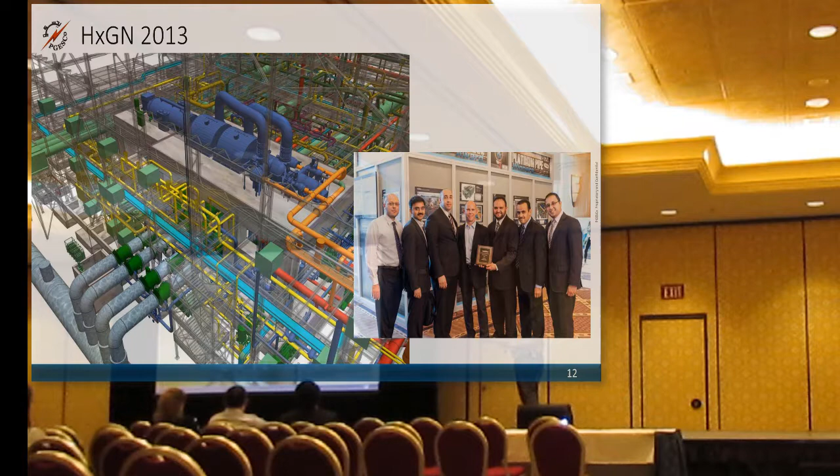Those are some of the awards and patents that we have received. It started in 2013, and yes, that was HXGN. We received first place in the civil specific category in the Golden Valve competition. As you can see, this is an example of one of the outputs we delivered using SmartPlant Review, which is an add-on module called the photorealistic add-on module. You can see that the piping was color-coded using display sets and this stuff. This is the main objective of this session - how we generate such beautiful drawings for presentations and owner presentations, okay?

Again, our civil department, Dr. Sami, has won the GTSTRUDL Excellence Award in 2014, and we won another award from Tekla, Middle East. In 2015, again we thought about putting the entire model inside the Golden Valve to win, and it worked apparently - we won second place also in the Golden Valve in 2015.

That was another award, and this was the first time we participated and won the Platinum Pipe competition. It was an automation idea presented in SmartPlant Review. We won second place, and I was honored to be presented by Robert Christian from Hexagon.

I delivered a session this year also, in 2016, and this was the first and last time, as I recall, Hexagon moved out from Las Vegas. It was in California. I loved California actually, and we delivered a session there about touchless design, computer interaction, and 3D design and review.

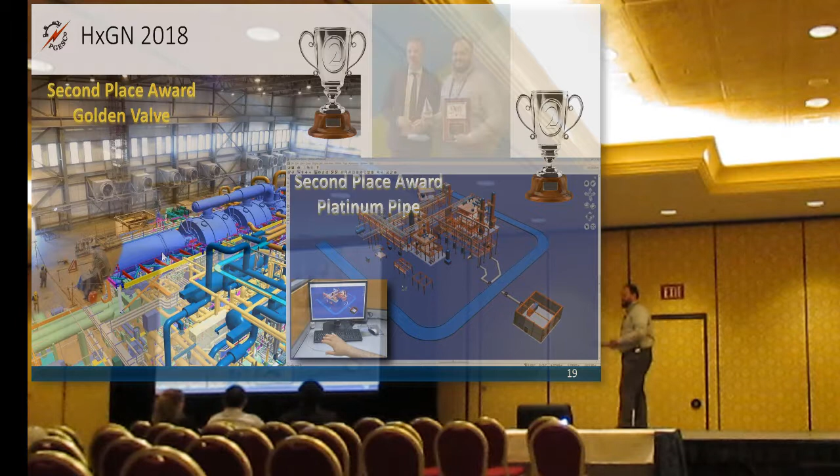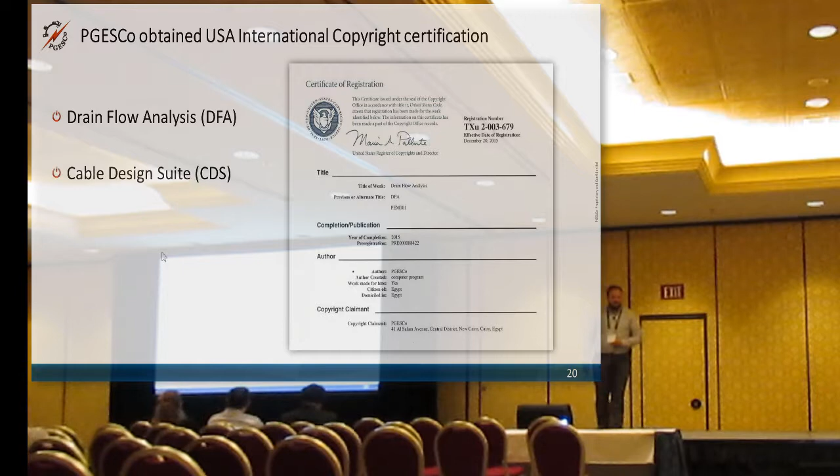We have won a number of patents internationally recognized. This is a US copyright for a drain flow analysis software that our engineers developed regarding the drain analysis of steam in power plants. We also developed another software for cable design and pipe support special items.

Now I'm going to move to the main topic of this presentation, the rendering and visualizing modeling group. Its target is to prepare good presentations and visualization for our projects to present to owners and clients. Our management realized that pure engineering works and drawings do not get that attention, especially when applying for a new project.

They thought we need to present our work in a more fashionable and luxurious way to show it to project clients, especially in the bidding and tendering phases, and it actually worked. In some cases we submitted our paper in a tender, and with just beautiful images and animation, the client was very impressed without going into details of the design. So it works somehow, and that's why this group was formed.

It's officially formed, called the Rendering and Visualizing Modeling Group inside PGESCo, and we mainly depend on Hexagon PPM products, as we can see in the following slides.

The main target is to prepare, as I said, snapshots and walkthrough videos for presentations and high resolution images, and to contribute in international design competitions like the Golden Valve and others.

We have performed some R&D activities, which we'll go through, in CAD and the user interface between the designer and the computer, and of course knowledge transfer and knowledge bridging to the new generation of engineers and designers. This is all tasks performed by our group.

This is one example of a model we got from engineering. You know how bad it looks. It's supposed to be 4 units, but there are only 2. After we did our job in the rendering group, it looks something like this. Some engineers just work for 1 unit and assume the other units are the same, so whatever clash is solved in 1 unit is considered done, and they didn't require the model of the other units.

However, the plant has 4 modules. If we go to the owner and show him this model, he'll say, well, where are the other 2 modules? So we have to do this copying using the MDR and stuff to get the model in good shape. Of course, you can see there's no land, no roads, no lighting poles, nothing. So we add all this, and the architectural team colorizes the cladding to make it look much better.

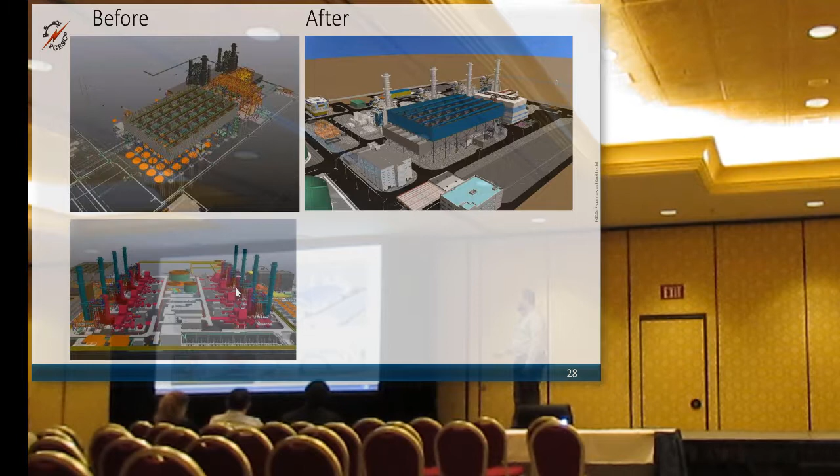That's another example of a project. This is the engineering project. As you can see, if we present this in front of the client, it will not have the same influence as this one.

Again, some sample output presentations that we use for the coloring, and this again, one sample. This was actually submitted to the Golden Valve this year, but it didn't win. It's okay, no objection.

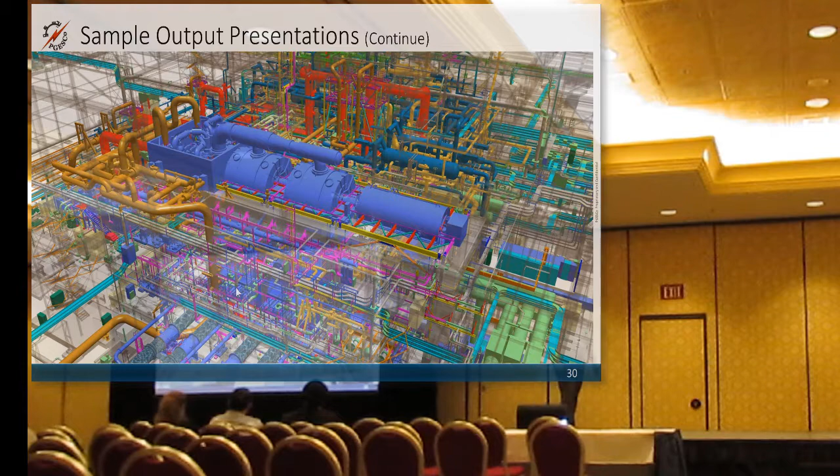Another one, it's an inside detailing of the STG building. It shows how the piping works. The engineering guys did a lot of work there in the cable trays and stuff. I'm going to go through those. This plant is in Egypt, apparently.

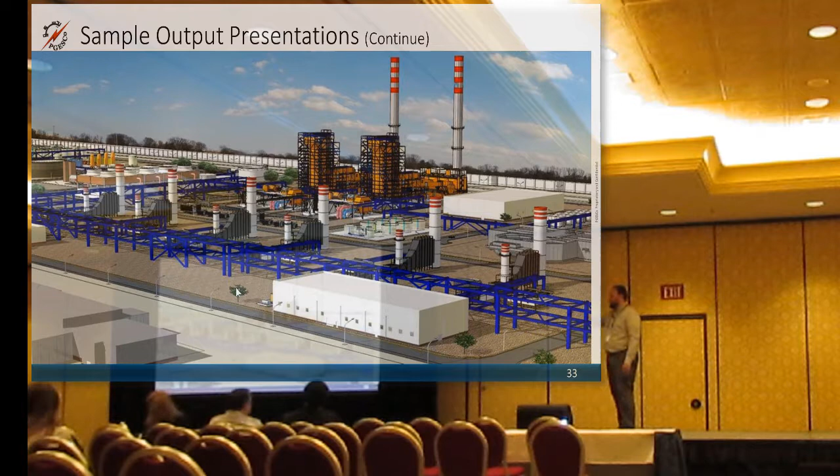This is one sample of projects where we don't have a 3D model. All of this is built in Google SketchUp. This is the only plant not using a Hexagon product, okay? All of these used imported blocks, and we can create this from scratch. We did this in 5 days, all of what you see here, for the presentation. We also did a walkthrough video that was very impressive for the client.

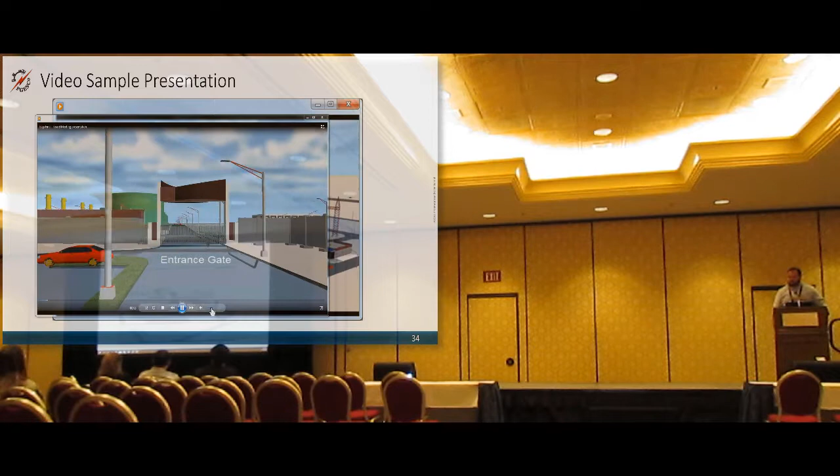This is a sample walkthrough, let me turn it on for you. Well, there's not just one, but I'm not going to go through all of it. Just to see a sample of how smoothly walkthroughs are done using SmartPlant Review. This is one of our projects in Iraq, before the war actually.

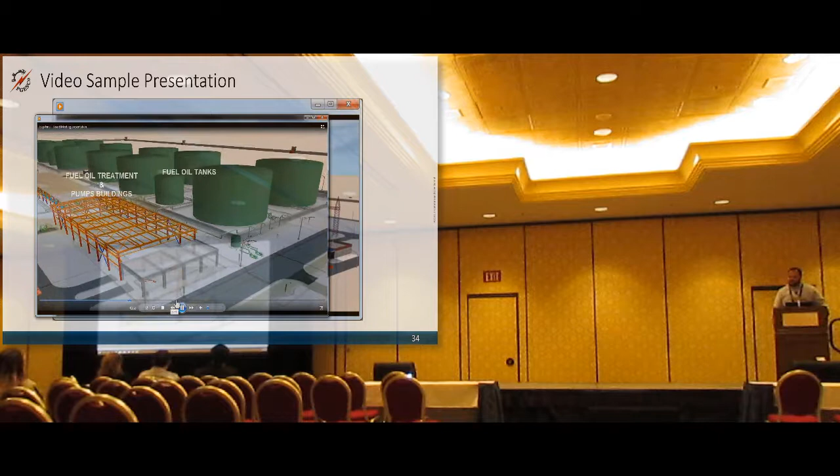This also helps the project manager when he goes out to the owner and describes the parts of the plant. He used this type of presentation.

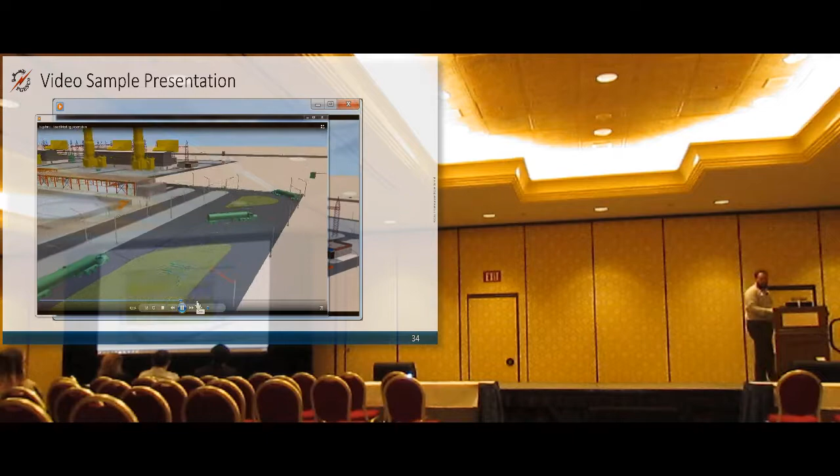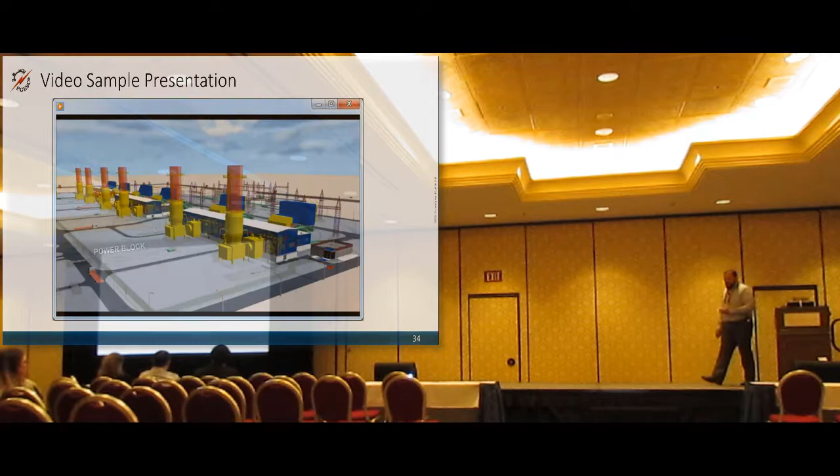Moving on, rather than just preparing images and screenshots, we were involved in some technology innovation solutions that we developed for our engineering team. I'm going to go through them in detail.

We are using something called stereoscopic 3D display, a feature in SmartPlant Review. We have developed 3D PDF, and we'll see how this goes. We also have our own VR lab. I will go through these one by one.

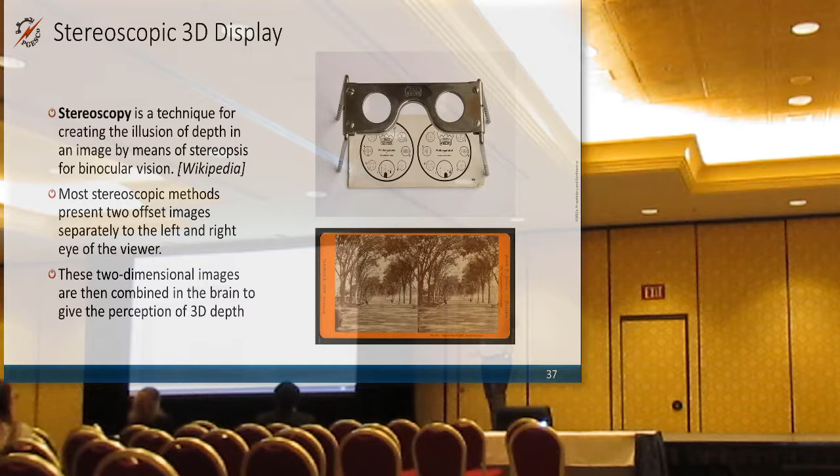The stereoscopic feature depends on the idea that every human being or animal has two eyes. Each eye catches a specific part of the world, and then the brain combines them together. SmartPlant Review does the same, it has this feature. Does anybody know SmartPlant Review? Please raise your hand. Okay, good number, it has this stereoscopic feature.

This is one of the unexplored features of SmartPlant Review. I wonder why the guys here don't highlight this, however it's very important and can be used a lot in the presentation of power plants. You can activate the stereoscopic feature in SmartPlant Review and get a glass to see the visual 3D aspect of the model.

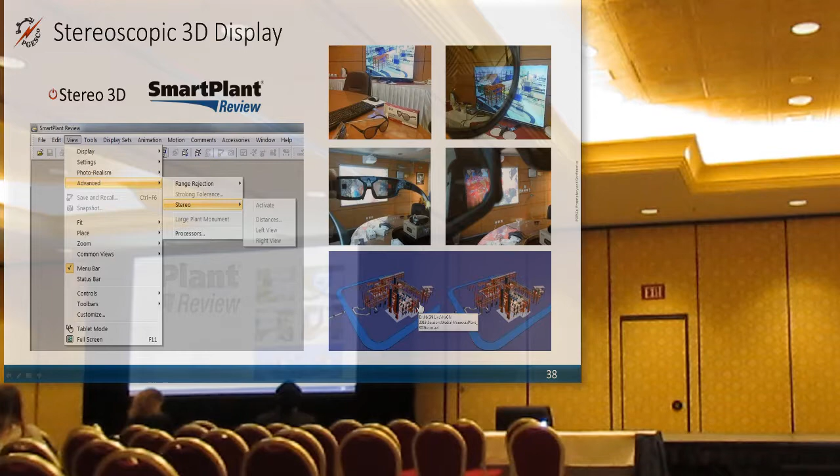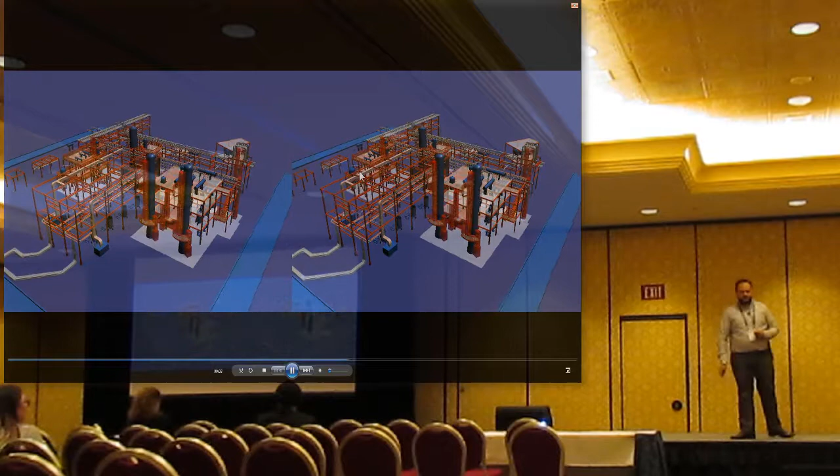I can turn on the video, like this. Of course you are seeing now two views, but when you wear the glasses you see it as one. Yes exactly, but it requires a specific type of projector called a 3D projector. This one is totally generated from SmartPlant Review using the stereoscopic feature.

Okay, I guess all of us know PDF, right? PDF, the well-known portable document format of documents. But does anybody know that there is something called 3D PDF? Has anybody heard about it? One, two, three, four, five.

Okay, that's good. There is a feature, again it's a hidden feature in SmartPlant Review, that you can take part of the model and export it as 3D PDF so that you can navigate it and walk through it on your mobile or laptop. That doesn't need any installation. Sometimes your guy on site needs to see part of the 3D model, and you don't have to install anything. You just export a piece of the model into 3D PDF and send him the PDF. He can open it with any Adobe Acrobat, which is a free player.

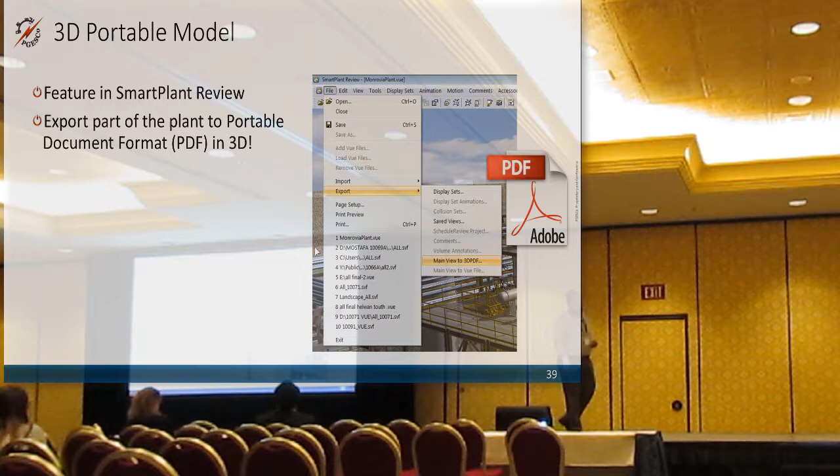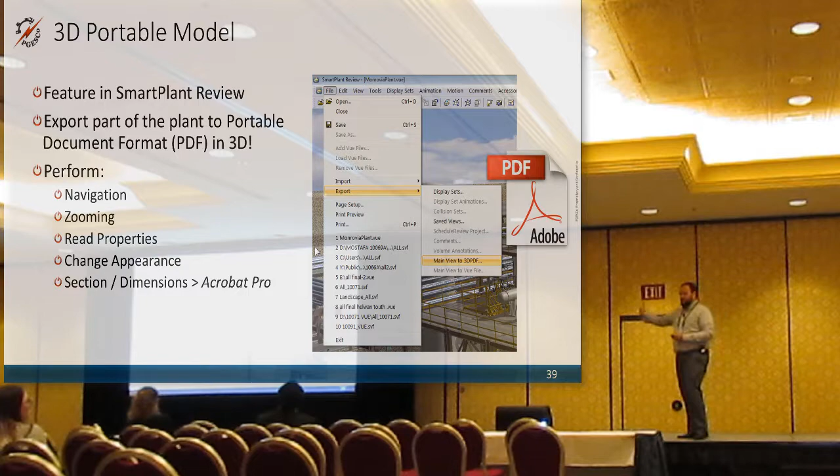You can do navigation, zooming, read intelligent properties of an equipment or piece of piping, change the appearance. I will show you right now how it works. And if you have Adobe Acrobat Pro, you can do sections and add dimensions, just like SmartPlant Review. It's a very interesting feature. Let me show you an example.

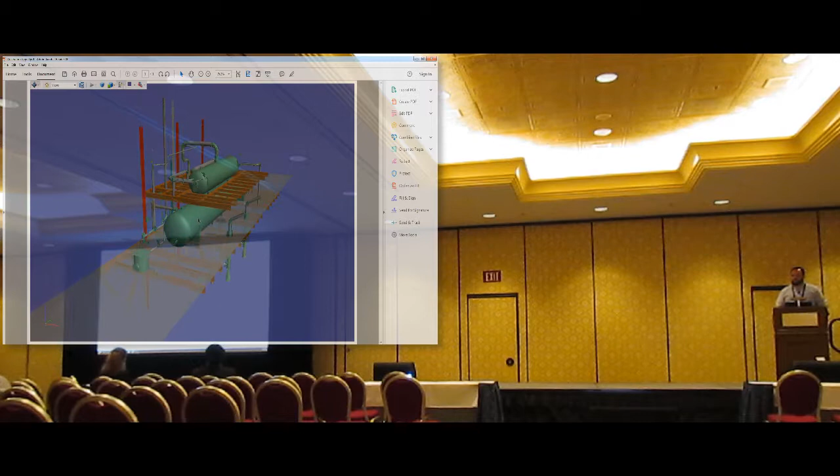This one is a model in Egypt. We took part of it and exported it as 3D PDF. As you can see, it's launching in Adobe Acrobat, which is on everybody's machine, which is a free tool. See? No need for any external 3D tool. You can zoom in, zoom out.

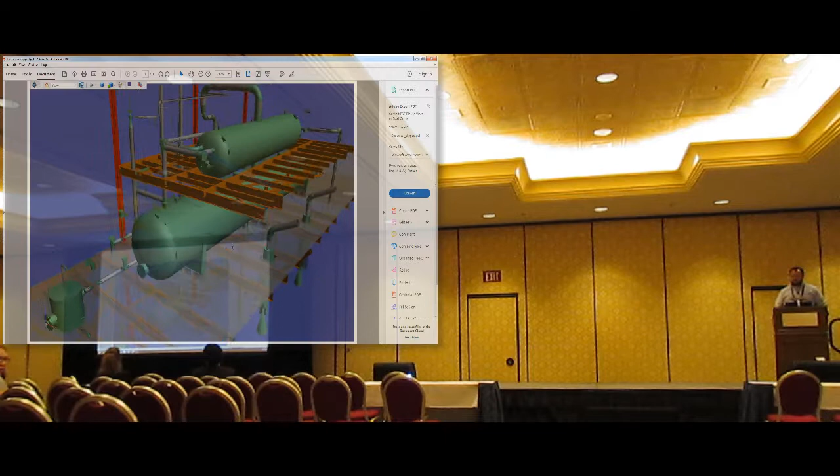This is very handy if you want to, in a fast way, deliver part of your model to the site. You can play with the coloring and stuff, and moreover you can check the properties of some part of the equipment. Let me show you this one. See this one. If I click on a piece of equipment, see down here, it gives you all the intelligent properties actually inherited from Smart 3D. See, all this in Adobe Acrobat. You don't have to install anything. That's very interesting, actually.

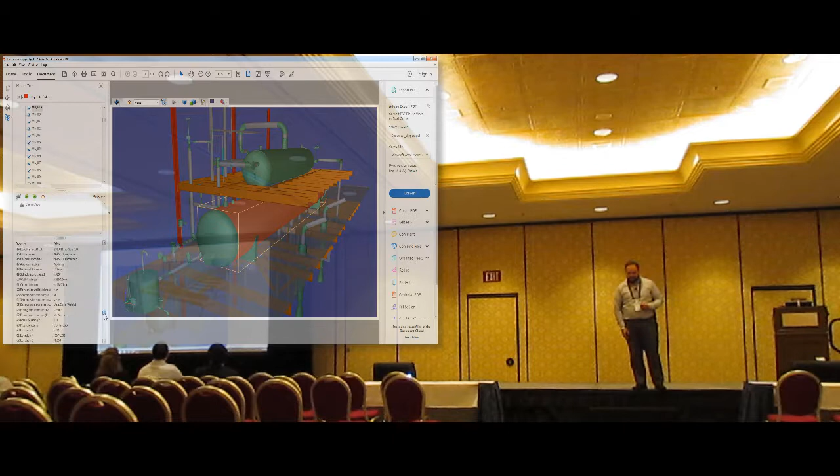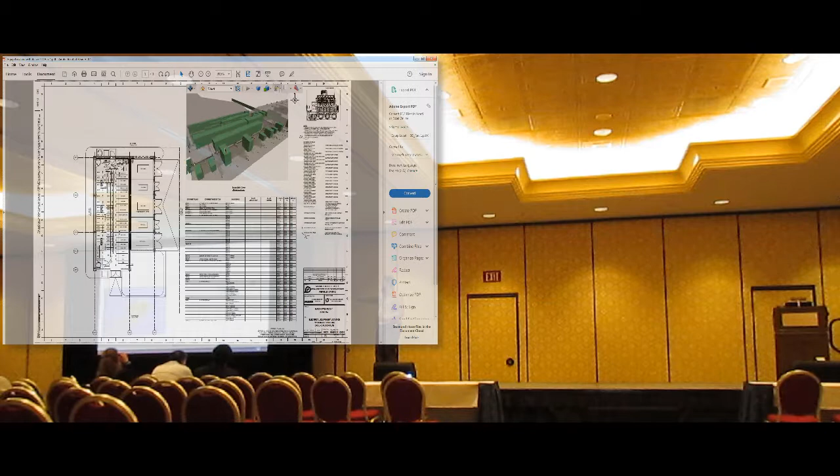We even took this idea further and created a new conceptual type of drawing, where the drawing itself shows the regular orthographic views that you have and the reports, and we added a specific view to be 3D PDF. So the guy in the field has every piece of information he needs. He has the top drawing, with the top plan, with all the dimensions and detailing he wished for, and the MTO, in addition to the 3D part of the model. So he can walk through it.

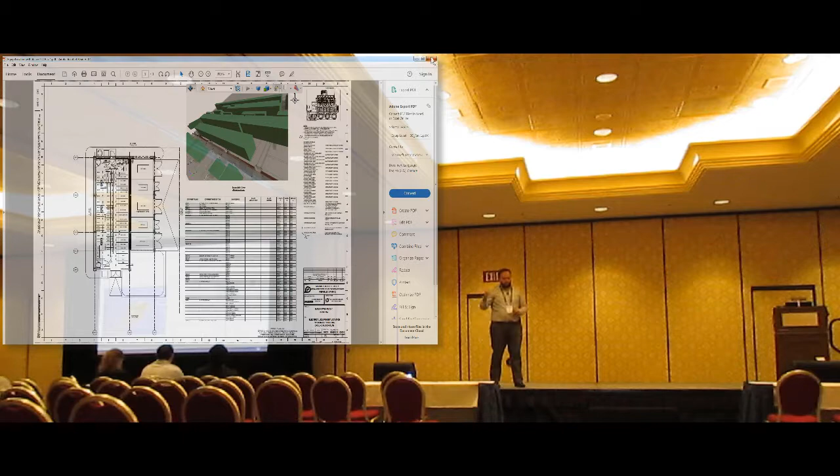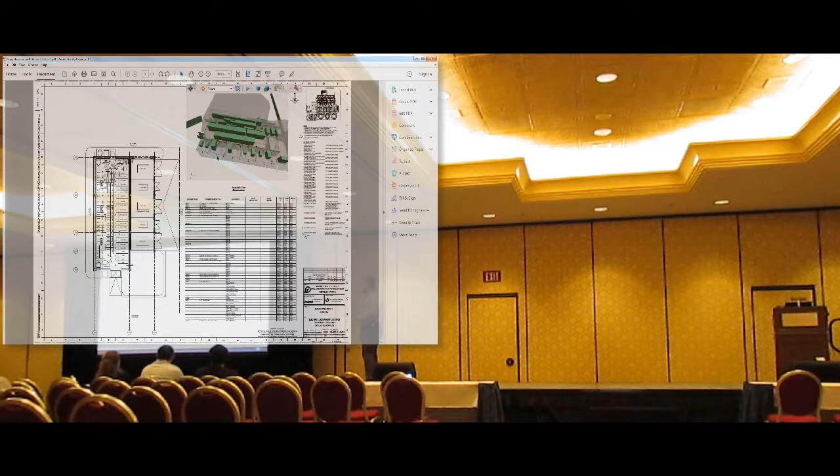In some cases, the guy out there didn't understand the drawing. He needs to see some 3D presentation and visualization. This is very handy, and we use it in our deliverables. This is one of the cable electrical equipment examples. In fact, if you want to try this yourself, you can do it right now.

It depends on your type of mobile. If you would like to do it, you can visit the store and download a tool called 3D PDF Reader. It's free, because the mobile version of Adobe Acrobat did not, until now, support 3D PDF, and they are working on it. I've read some articles on their forums. They are working on it. So if you have Adobe Acrobat on your mobile, you will not be able to present it in 3D yet. But if you want to download this one right now, you can do it.

How big are the 3D PDF files? 3.6 megabytes. So, yes, this one is 3.6, or maybe 2.6 megabytes. That's it, with all the information, intelligent information.

We have thought about building our own VR lab. We have bought some hardware like Oculus Rift and Samsung Odyssey. But the guys there are facing some issues in the conversion from the VUE files of SmartPlant Review to the Unity files. But Robert Christian has mentioned in the TUF that in the new version of SmartPlant Review, they have fixed this issue.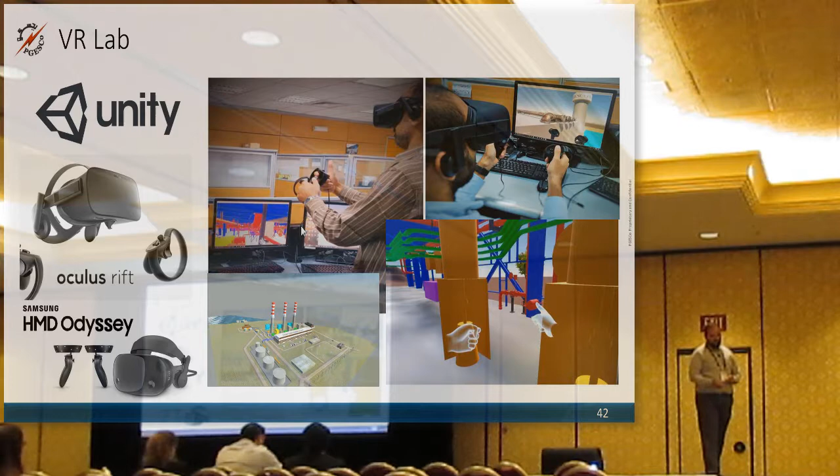So they can directly convert from the VUE file, which is the file type of SmartPlant Review, into FBX directly, which is used by Unity, the software for the VR. But we have performed some successful experiments using the VR.

We have introduced another lovely technique. You know the Wii remote, the Nintendo Wii? It's a small game controller. It was actually my son's, and I took it from him. I tried to program it to work in SmartPlant Review, and it worked.

Rather than the mouse, we can do the zooming, properties and everything, and we had a lot of fights with my son - he wants to play and I want to navigate. So at the end I bought a new one.

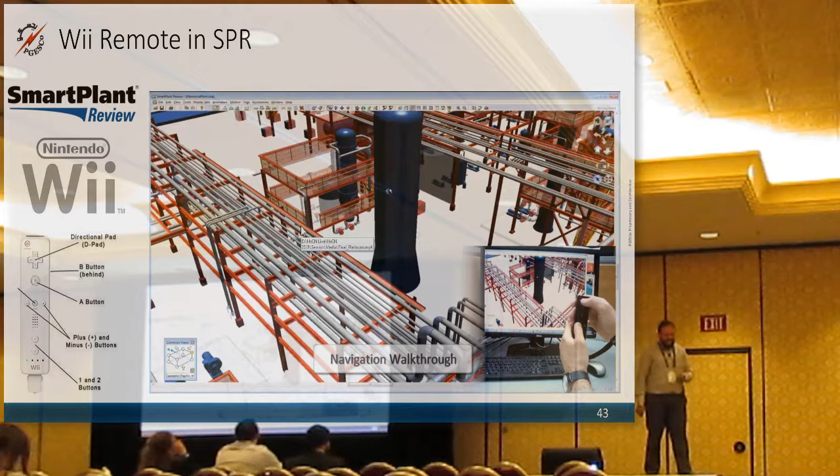And moving forward, we purchased this device from a company called Leap. It's two infrared sensors that detect the hand motion of your palms and convert it into coordinates that you can use as a mouse inside SmartPlant Review.

And so we were able to make the walkthrough and even do some piping work and cable design work without need of a mouse or touching anything, just airborne. If you would like to see how it works, this is the video.

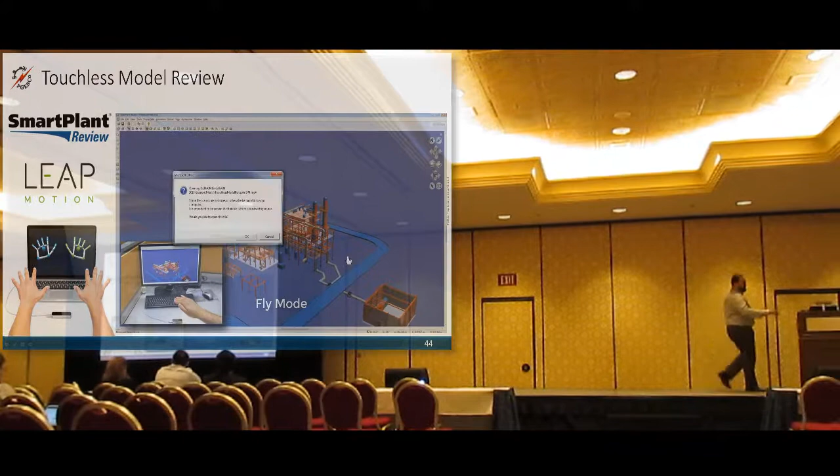This is the sensor and how it works. You see it reflects. It's a little bit creepy.

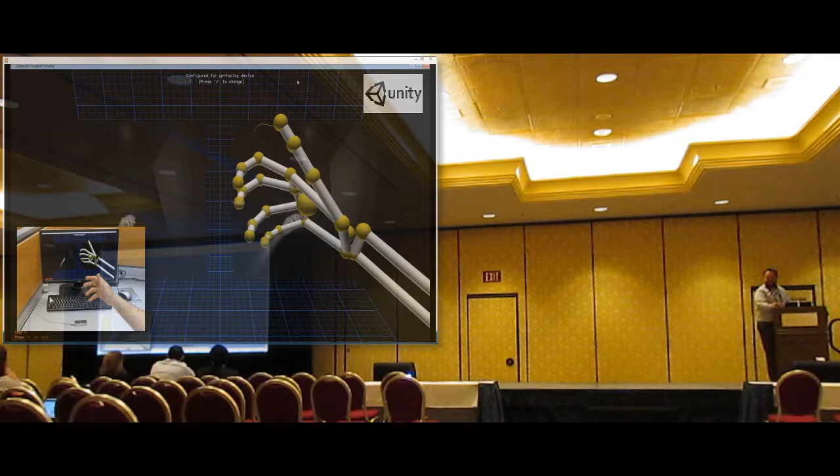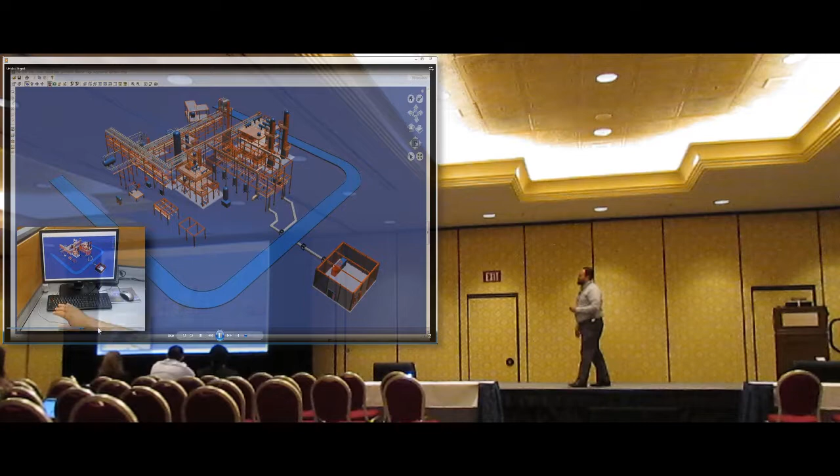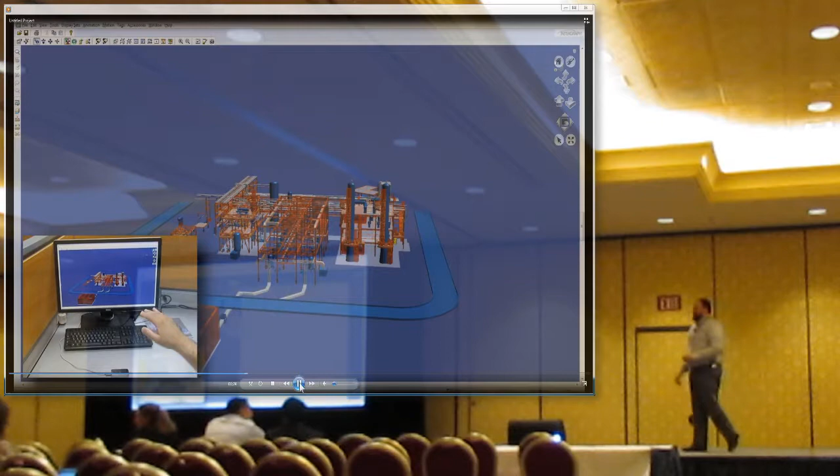But of course it has a limitation - you have to be within the proximity of the sensor, about 50 centimeters. You can't put it there and stand far away. It has a limitation. Yes sir? Is it out of box or did you program it to work with SmartPlant? There is a third party system that we used to program the hand gesture into commands.

We used the leap motion sensor in some modeling and routing, for example pipe routing and cable tray routing.

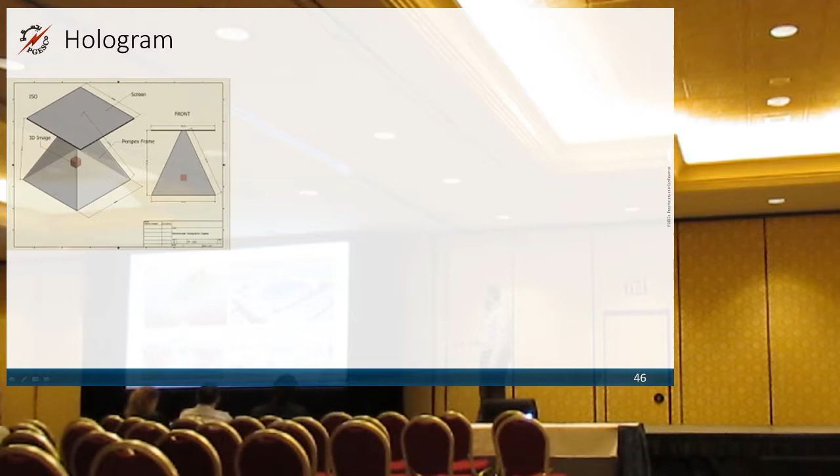We have used SmartPlant Review in generating hologram reflections of some of the 3D model components, like the turbine. We developed a device for using these reflections. This device was showcased at the Maker Cairo Fair.

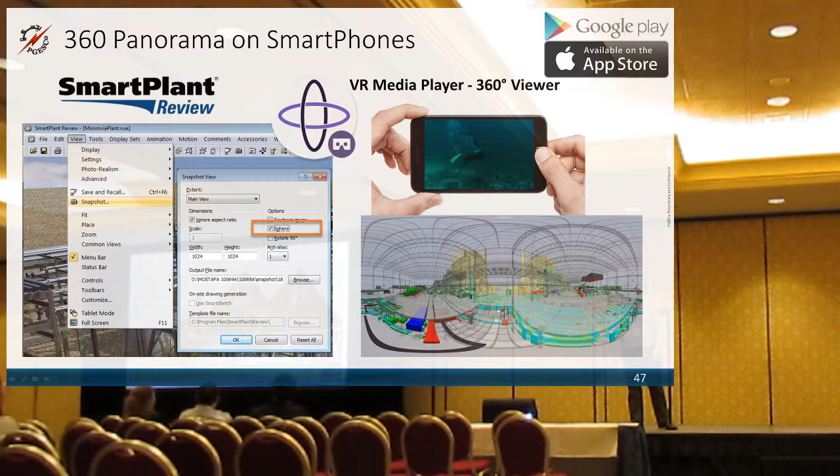PGESCo have achieved the 2020 vision and are starting to implement the vision towards 2025.